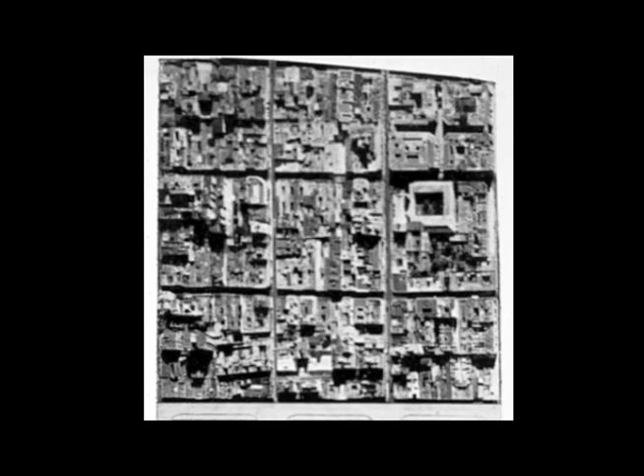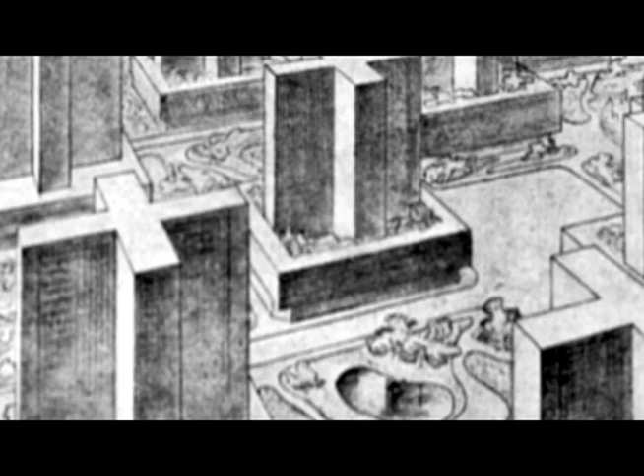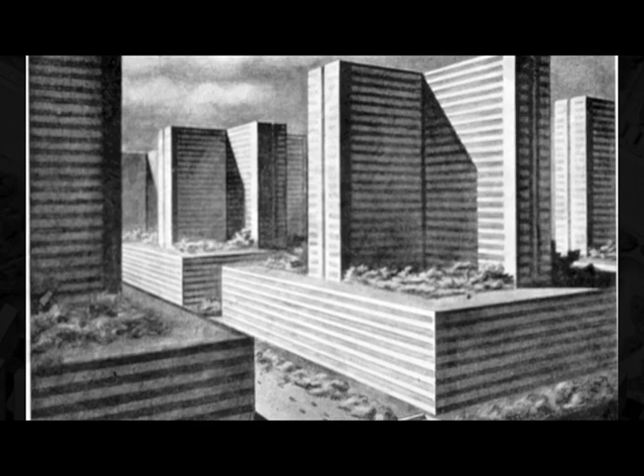With all the new transformations taking place in Buenos Aires, he began to conceptualize ideas for the new city. He set out to invent a form of life of relations, which would emerge in the city of Buenos Aires. He envisioned replacing the dense colonial grid with a network of linear elements that would weave throughout the city. He envisioned a 100-meter-long, interconnected structure designed to establish new zones of commercial, industrial, and social exchange, and projected the possibility of de-urbanizing the city. New buildings would be organized to optimize the light into the city.

Acosta stated in 1931, "Gradually, from the chaos and disorganization of our civilization, a new form of thinking is emerging, a new mode of seeing things, and with it, a new relation between humanity and the world around us, between the parts and the whole."

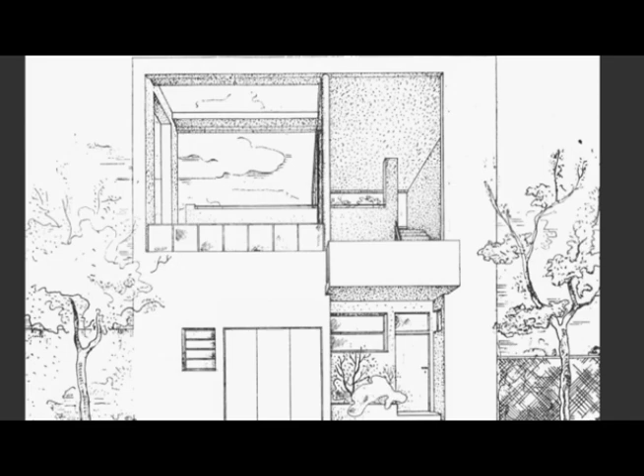Acosta's research in vivienda y clima led to the development of the helios system, which he spent years designing. The system is an inherently functional system, but by focusing so intensely on design responding to the climate, his architecture transgressed from functionalism and became theatrical. When designing the helios system, Acosta spent time experimenting with different shading devices, orientation, and ventilation systems.

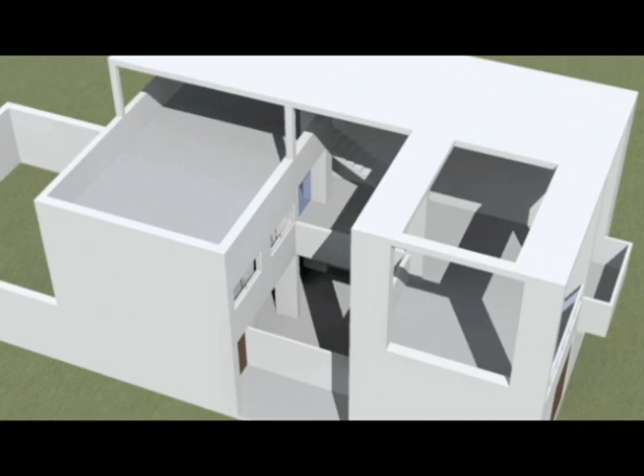The science behind his design was that the sun provides heat, and that the building is a thermal mass. The helios system was meant to accommodate both the summer and winter climates. The orientation was the key element in the design, and the optimum orientation was northeast. Southern orientation was required for visual work, such as drawing or reading.

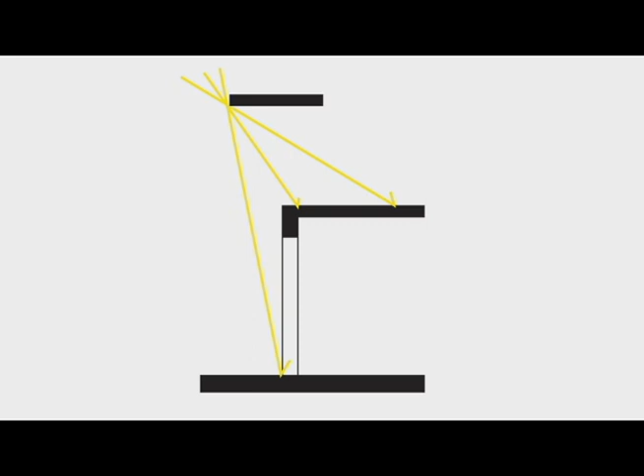The next problem was designing how to let light into the building. Just having punched openings was not enough, and by using horizontal and vertical planes, the helios system could control how the sun entered the space. Acosta experimented with the placement of these planes. In his research, he came to the conclusion that creating a 2-meter plate and elevating it to a double-story height would accommodate the sun for both the summer and winter months.

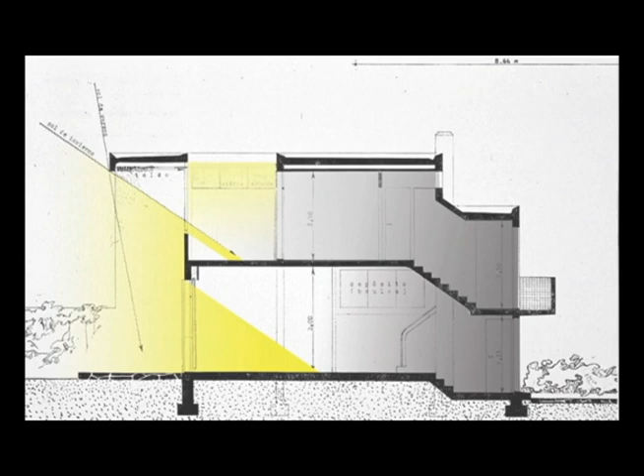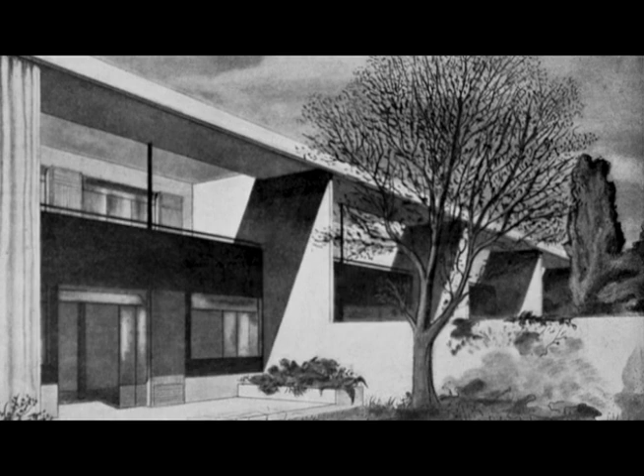These architectural elements also served an aesthetic purpose, creating a shadow zone. This distinguished between the outside and the inside. In Argentina, the architecture did not respond to the climate, and there was a desperate need for housing. The new housing that Acosta would propose would interact with the sun, a theme that has been present in architecture as far back as ancient Greece.

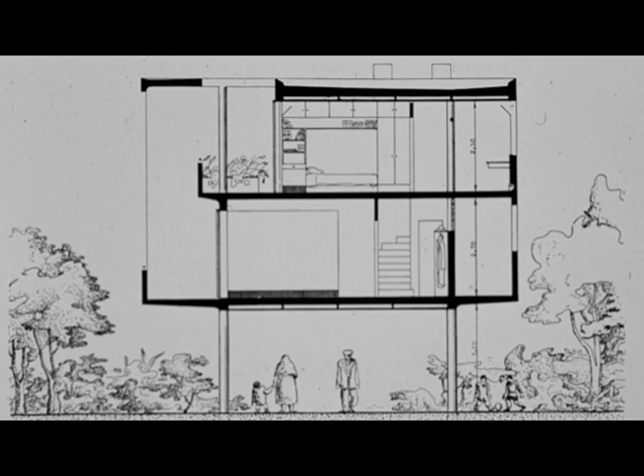The Greeks oriented their temples east-west, symbolic of life and death. Though the temples had more of a symbolic relation to the sun, the importance of the sun in the culture was represented through their architecture. Acosta took this symbolic relationship and made it real. This relation manifests itself with the architecture by how the space was experienced, as well as how the building dealt with climate control. Drawing from Greek mythology, he named his concept after the god of sun, Helios.

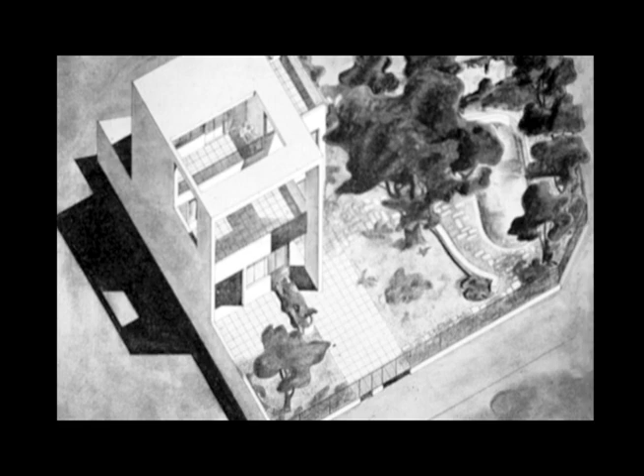The use of sun shading to protect against the sun was not a new idea. Le Corbusier made substantial progress in the design by the brise-soleil. Similar to Acosta's helios system, the brise-soleil helped with glare from the sun as well as climate control. Acosta took the concept of a brise-soleil a step further, having his designs completely integrated with the architectural elements used for climate control.

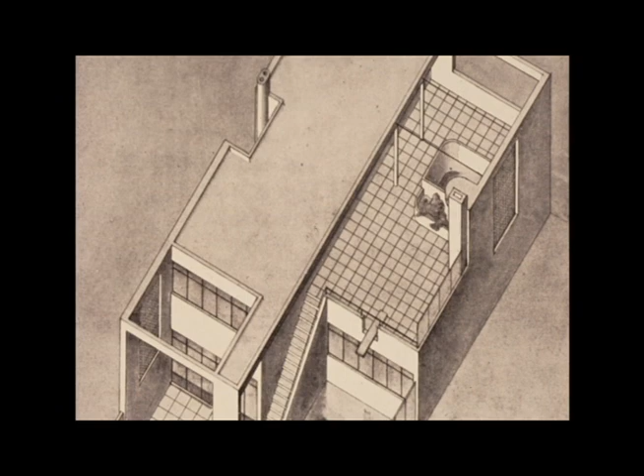Acosta developed the helios system to be functional. He wanted to design architecture that responded to the environment and the needs of the inhabitants. The design is modern, based on science, new technology, and the human form.

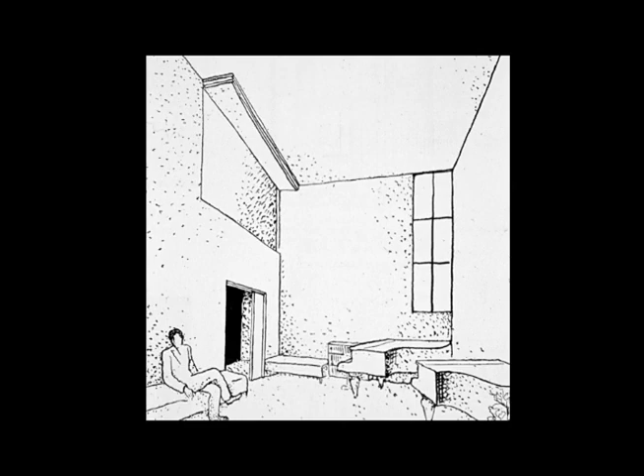Early in his career, Acosta designed furniture that relied on the human form. He designed a chair that used bent metal tubes, which had some give to allow for comfort. Acosta believed the difference between modern architecture and classical architecture was the issue of aesthetics. Though he designed ignoring any sort of aesthetic ideals, his interiors had a distinct expressionist quality.

The majority of his houses were made with white plaster, not using any ornamentation, so the dynamic qualities of the houses relied on science, or how the houses interacted with the sun. The influence from his early work in set design is apparent in how the interiors are represented in his perspectives, and how the sun enters a room.

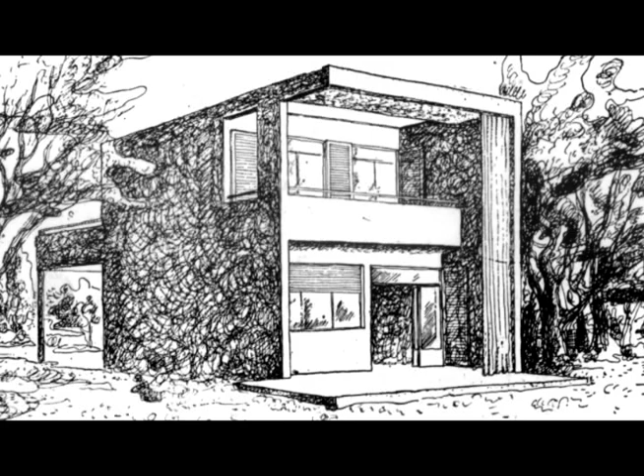The architecture that he designed was so reliant on this one function that it actually transcended the ideal of functionalism and in a way became poetic. The poetics of the helios system did not come from the scientific research behind the system, but in a way, he designed his architecture to engage the sun on the interior.

The housing from ancient times was made of cheap materials and did not last. This sparked his interest in housing that would transcend time. Using durable materials and an ageless concept, he had interest in designing housing. Though he applied this concept in different locations, he changed the materials to match the local conditions.

This can be seen in his houses in Cordoba, Argentina. He utilized the local stone material instead of the plaster that he typically designed with in the area of Buenos Aires.

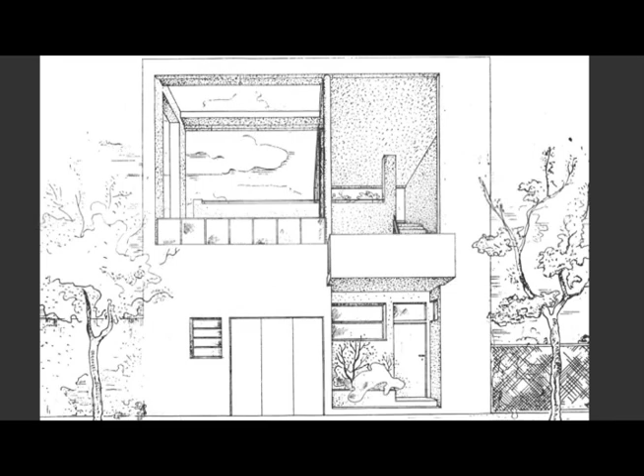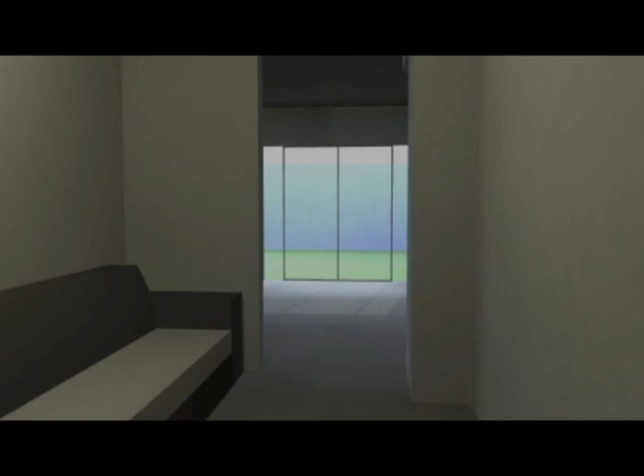Villa Urquiza was designed from 1934 to 35. The design utilizes research and applied the helios system. The villa incorporates a two-sided cupboard that could be accessed from the dining room and from the kitchen to allow for easier cleanup after dinner. Many of his houses incorporated this element, including earlier houses he designed in Germany. This cupboard was intended to aid the occupant.

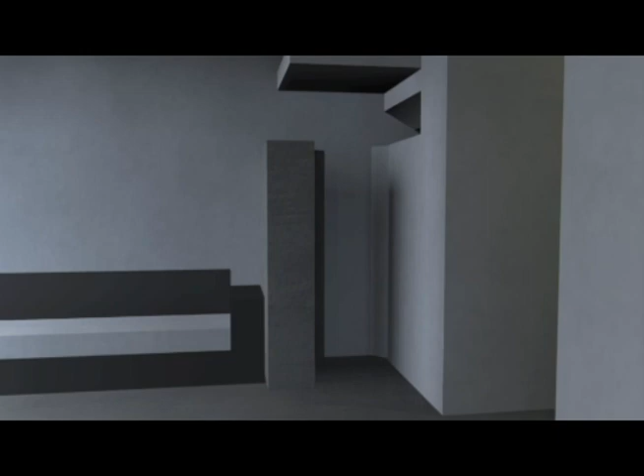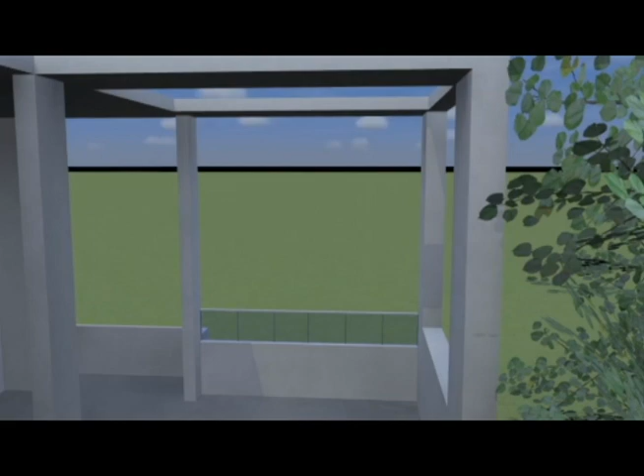Like many of his other designs that use the helios system, the house has pristinely plastered walls. The enclosed spaces are a series of volumes within planar elements that act as shading. This is one of the reasons why Acosta's system is successful, because the shading system is fully integrated into the design. He applied the design of the helios system to multiple projects.

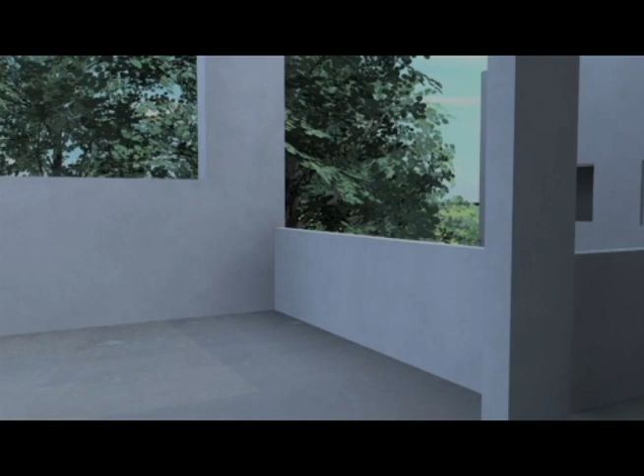With these projects, his presentation drawings of the design were drawn with the rationality of the system, but his perspectives showed the theatricality of the spaces.

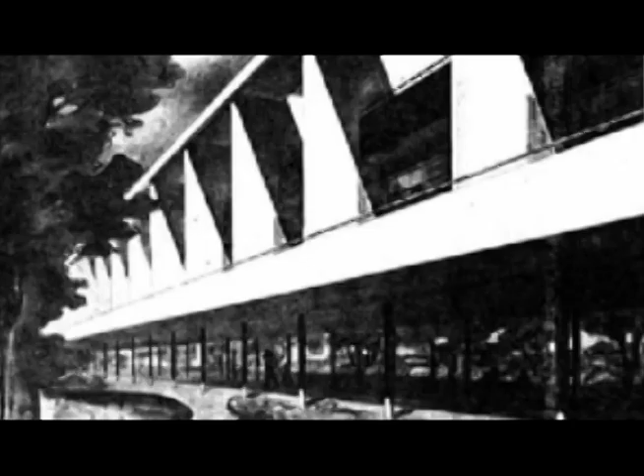Acosta took the design for single-family homes and applied them to multifamily housing. There were two different typologies used, one raised off the ground on pilotis, which is typology 1, and the other on the ground, typology 2. These multifamily homes were meant to help fix the housing crisis of the time and create safe, affordable homes.

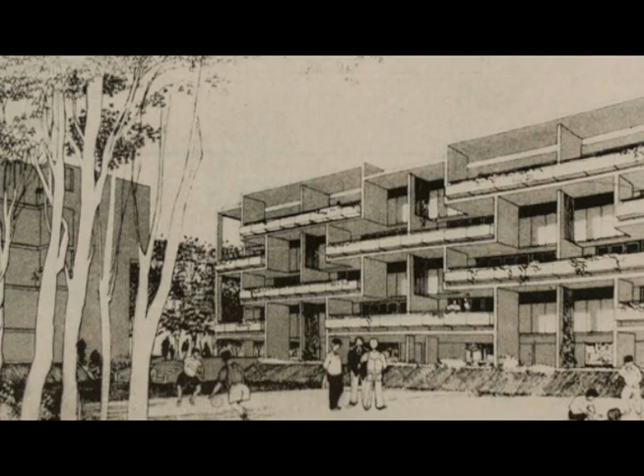Proyecto de unidad vecinal, or multifamily housing for the Isla Maciel, was a response to the slum conditions on the island. The way the housing was laid out on the island created spaces where gangs would gather, which would make unsafe conditions for families on the island. In his design, he eliminated the corridor, instead having multiple stairs that would go up to the different apartments. In having a design that would eliminate the corridor, there would be fewer occurrences of arguments between neighbors.

The design also had an open public element that would allow for a community to form, but all the apartments had their own private balcony. These balconies were off of the dining and living rooms to create an extension of these spaces.

In the project Edificio de Departamentos en la Avenida Figueroa Alcorta in Buenos Aires, Acosta experimented with applying the helios system vertically. In this project, it can be argued that they are not as successful. This could be for many reasons. Many of his more horizontal projects also received sun shading from surrounding plantings, but the tower did not have that same condition. Also, his designs were typically a mass within a series of planes. The apartment buildings did not have this element in the design. The shading system was only applied to the facade.

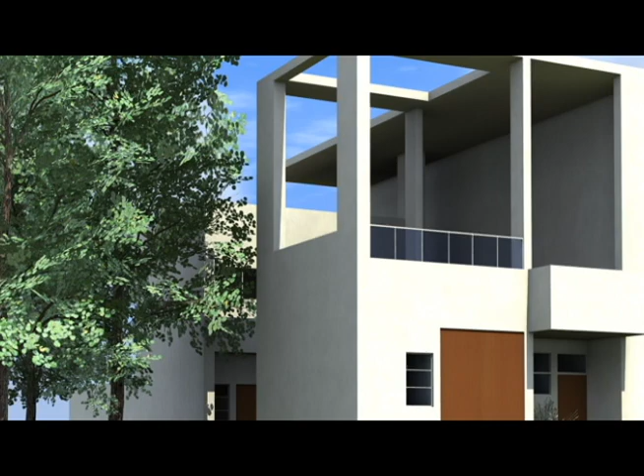Throughout his career in Argentina, Acosta was concerned with how the common man lived. With this concern, he saw a solution through developing the helios system, a system which would respond to the environment as well as the need for a durable housing type. He devoted most of his life to this work, and although many of these problems still exist, his concept for the helios system is still seen today in the form of sustainability.